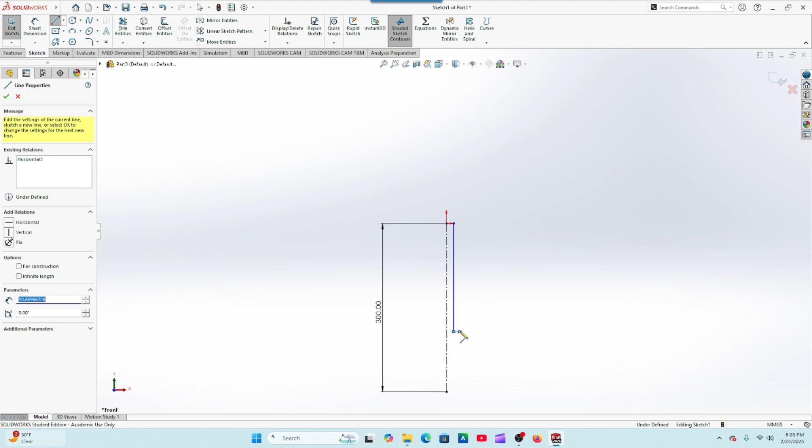Then we're going to come down about 35 millimeters. Then we'll come out this way about 20, and then we'll come down about 20, like so. Right there.

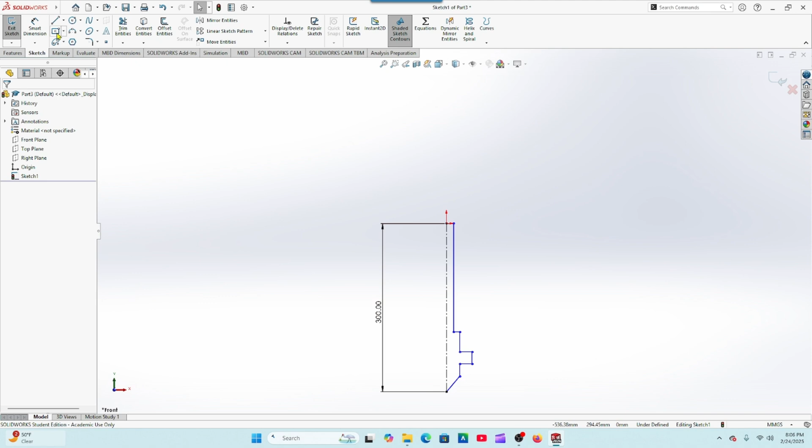And then I want to come in, about even with here. Then we'll come down just a little bit, and then we'll tie it all in down here at the end, like so. All right, so first thing that we can do here is we're going to go ahead and do some dimensioning.

We're going to do this first one here to here, and we're going to say 92 divided by 2, right to there. And the other thing that I need to do is make this line and this line collinear.

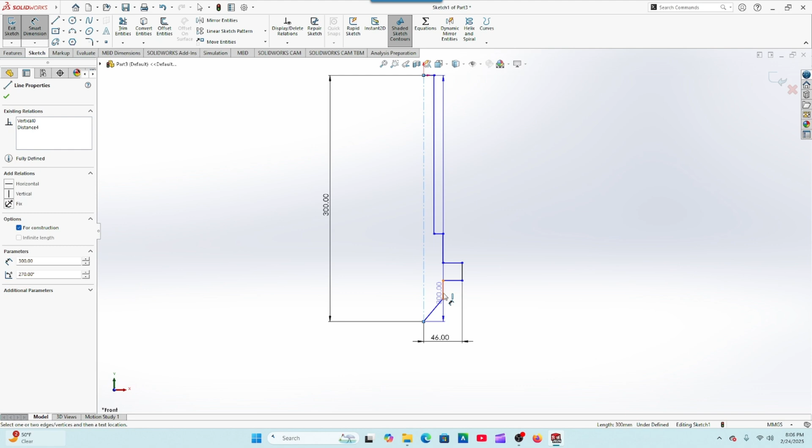Then I can go back in here and I can start dimensioning, and this one is going to be 20 millimeters. And then this one all the way up here is going to be 12.

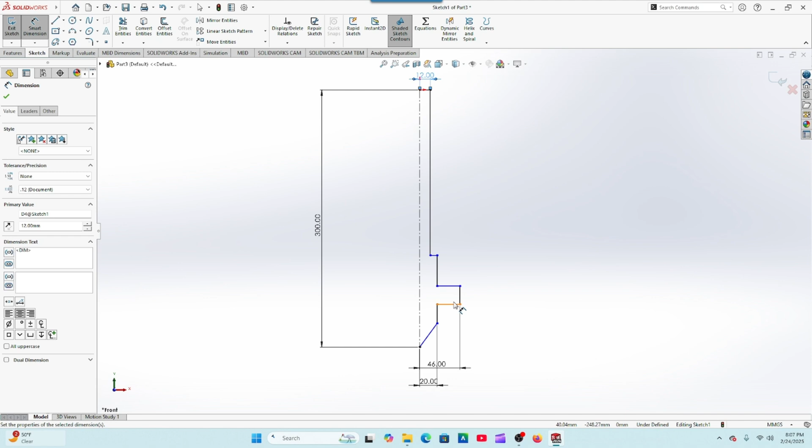All right, so now the only thing that we have left to do is we need to put some dimensions in here. So we're going to go ahead and do this one at 35, and we'll do this one at 20.

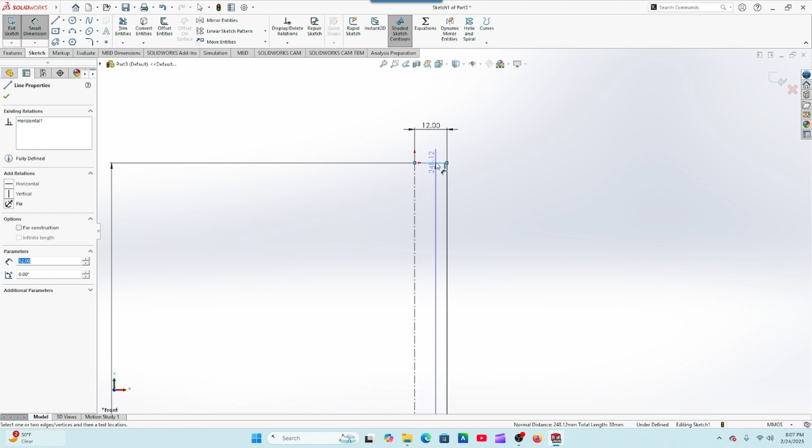Right there. And then I am going to dimension from here to here, and we're going to make that one 241, like so.

And then the only thing that we should have left to do at this point is here to here. We'll just come up there and we'll make that 30 degrees, like so. Go ahead, our green check mark - we have a fully defined sketch.

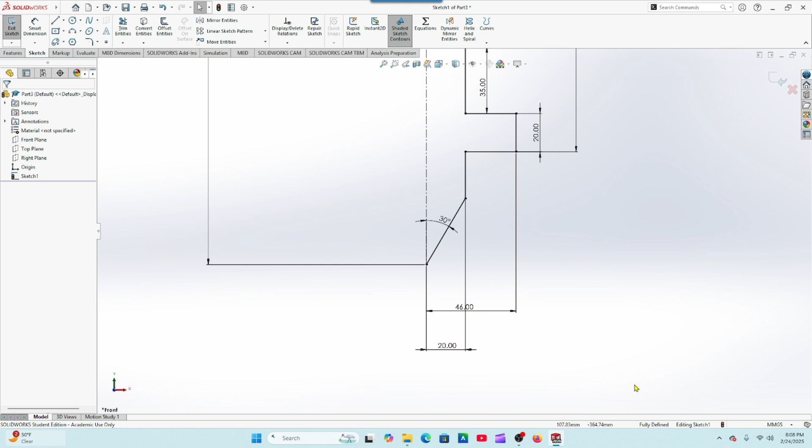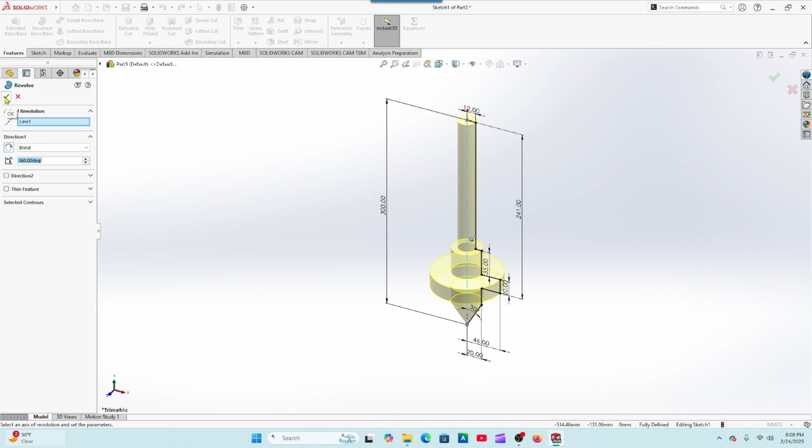So we can do a revolve. Now this is going to give me an error because I didn't draw a line all the way down there. It's going to say the sketch is open, would you like the sketch to be automatically closed? We'll say yeah, and it'll add that line down through there, and that is what it is supposed to look like.

So we can go ahead and hit our green check mark. I'm going to go ahead and hide my sketch, I don't want to look at that. And we are done. So this is Chapter 5, Hands-on Test Drive 2. So let's go ahead and save this one.

Chapter 5, and then Hands-on Test Drive 2. Got that all saved up in there. We'll go ahead and hit save.